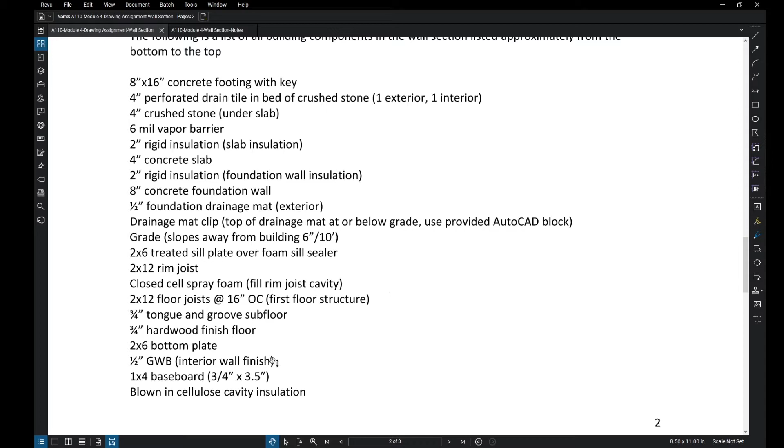I suggest you read through the list of building components in the instructions as you examine the wall section drawing that includes the notes. And that's what I have open here. So here are my instructions, and these show in the details a list of all the building components that will be in this wall section. They are listed approximately from the bottom to the top. So we start at the foundation with the footing and work our way all the way to the top of the wall section. So if you're trying to figure out where these are, that will help you understand in the wall where they're located, top to bottom.

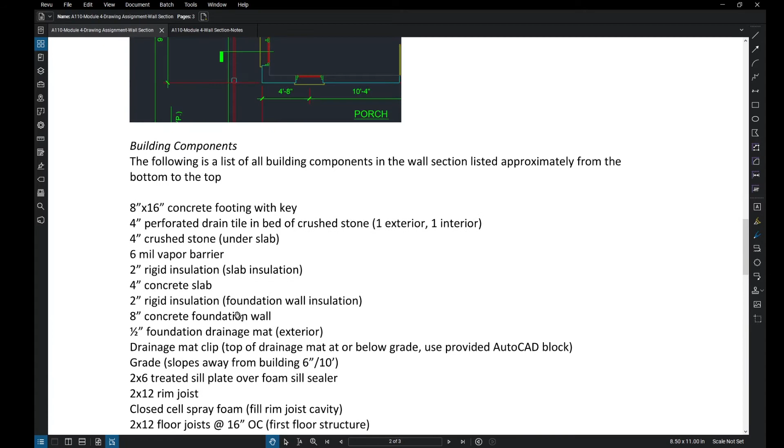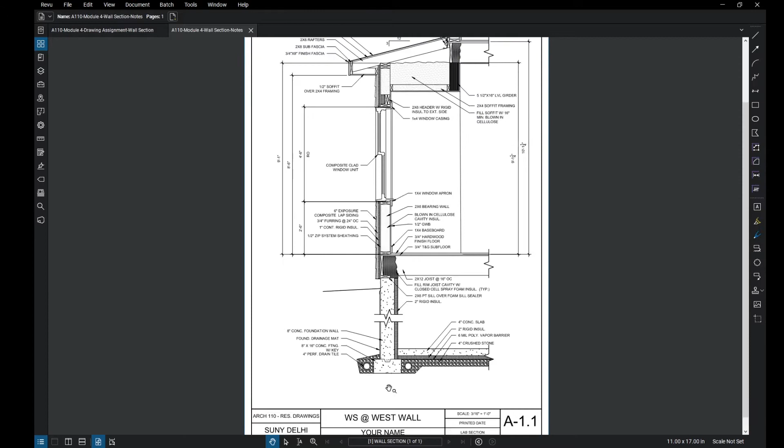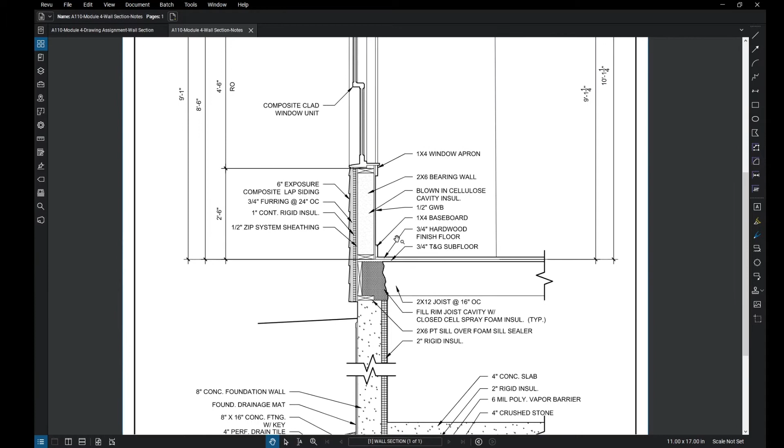And I suggest reading through this list as you look at this, which is the wall section. This is essentially the same as your final deliverable, only that you don't need to place notes or dimensions on your drawing. So read through those notes as you look at this drawing. And this drawing includes some notes as well. So it points to some of those things in the instruction notes. The instruction notes are a little bit more comprehensive. It lists everything that might not exactly be listed here. A lot of times I won't have something noted here because it would be redundant, whereas in the notes and the instructions I do have them listed.

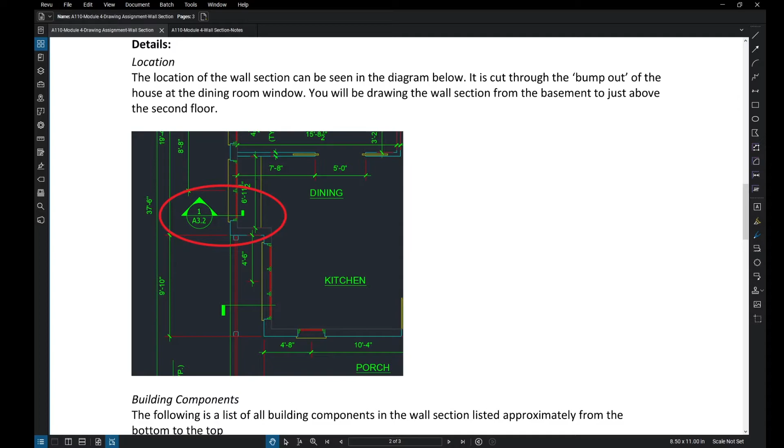Before we get started, it's important to understand exactly where this section is being cut. In your instructions, it has this location. So we're in the dining room in our double mull window unit, and we're cutting through the wall here. And we're looking north. So the exterior is going to be on the left hand side of our drawing, and the interior is going to be on the right hand side of our drawing. I'm going to jump to CAD now, to AutoCAD.

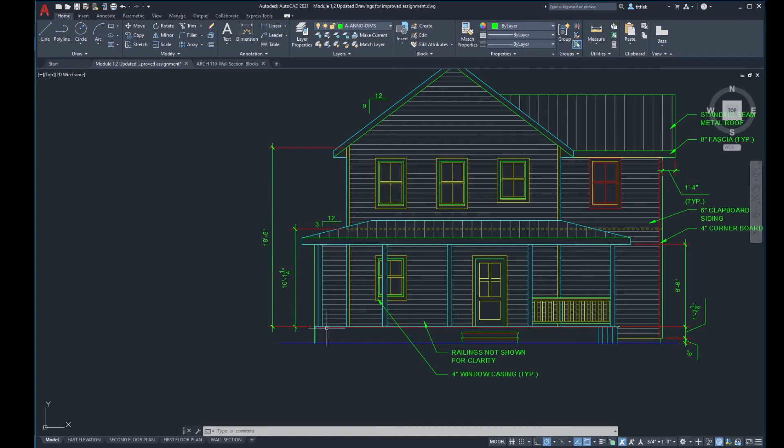So again, this is exactly where we're going to be cutting this drawing. So we're cutting it through what I've been calling the bump out, this portion of the building. We're going all the way down into the basement and up to the roof structure of the bump out itself. So if you look here in our elevation, we're going to end the section somewhere on the second floor, right above the second floor around here. We're going to be cutting through this roof structure, down through the interior of the building, and then into the basement. So that's the first thing you want to do, is familiarize yourself with where this is going to be cut. And we're cutting through a window, so we're going to see what this looks like in section.

I'm going to start my drawing with this building section. Much like many of our other drawings, I always try to start by using a drawing that already exists, that has some information that I already need in my new drawing. Now we're looking in the wrong direction for my wall section. My wall section looks opposite this building section.

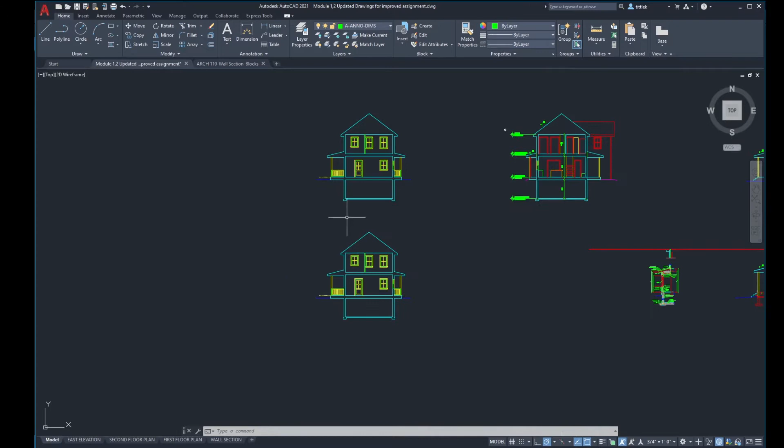So what I want to do first is copy this. I'm just going to copy it downwards. Again, a comfortable distance. You can see how many different drawings I have in my own file here. I have them spaced a comfortable distance so that when I place them inside a viewport on my layout tabs in my paper space, I have enough room so that I don't include anything else. Now that I've copied it down, as I mentioned, this is looking in the opposite direction.

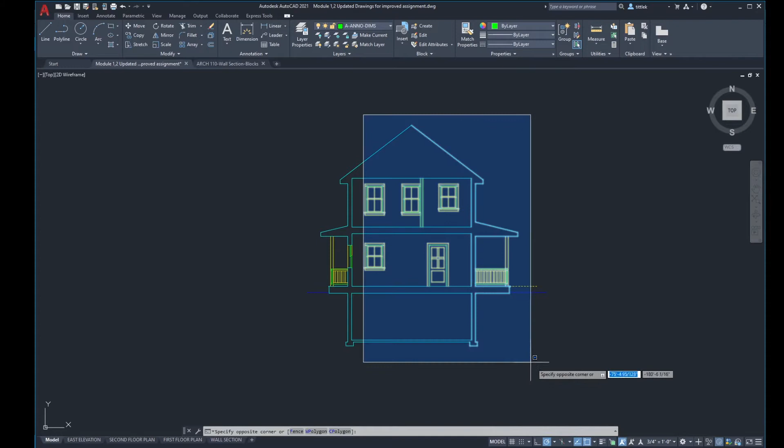So the first thing I'm going to do is flip this around using the mirror command. So MI, enter. I'm going to select this entire thing, and I'm just going to use my ridge as my point, drag a vertical line, and when it asks me to erase the source objects, I'm going to say yes, because that'll just flip this entire section. And I'm going to erase pretty much everything from these windows to the right side of my drawing. I'm just going to hit delete.

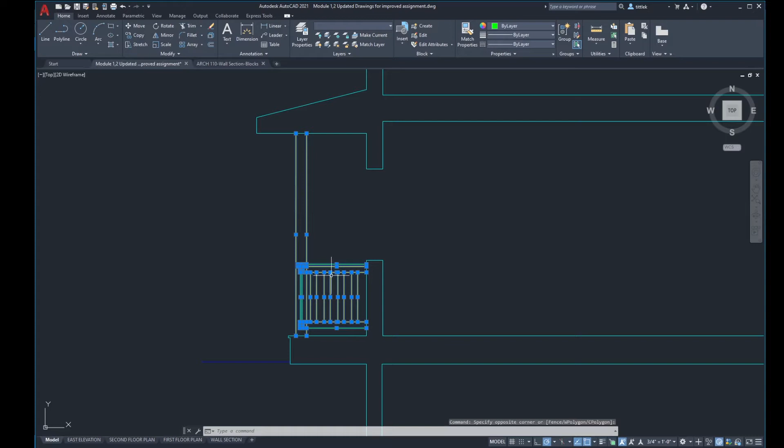I'm also going to delete this window because this building section was cut through the kitchen, and now I'm cutting through the dining room, so that window is going to look different, especially because we're adding a lot more detail. Going to also delete all of this porch railing and post. And now I have a good start for my wall section.

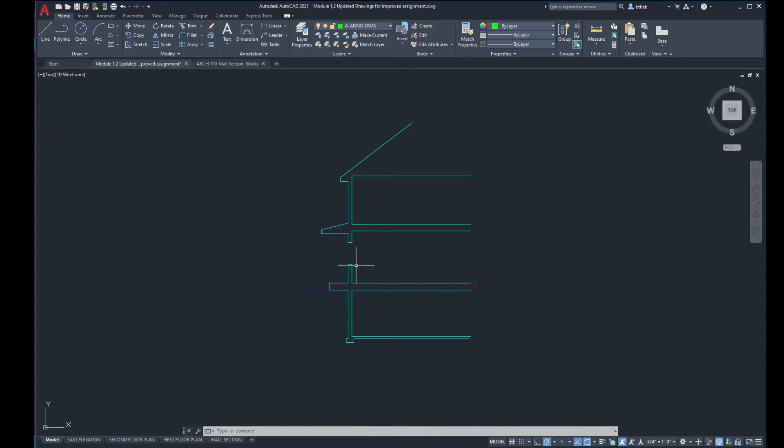I should also note that with the amount of detail that we put in our building section, some of these lines may not exactly be in the right place, but this at least gives us a good start. The way that I like to draw my wall sections is I like to start just like you would build the house. Start at the foundation and work your way up. So that's exactly what I'm going to do here.

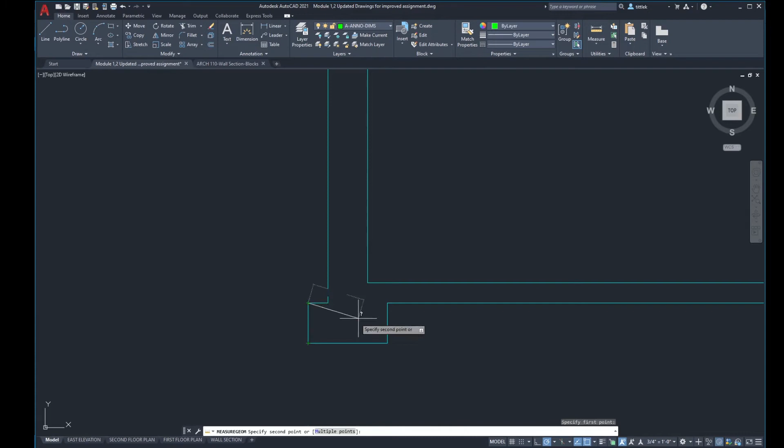So I'm going to double check how I drew my footing in the building section, and it is in fact 8 by 16. My wall, my foundation wall, is 8 inches as well. So all of these lines can remain. I'm going to draw the key. Keys are typically 2x4s that are set into the formwork, but they're shown at an angle because you want to give it what we call draft angle so that that can be pulled out of the cured concrete.

For now, I'm going to draw most of my lines on the color 004 layer. I will work on getting my line weights correct as I go through this, but I'm going to get some stuff drawn first. So I'm going to start by drawing a line across the bottom of my foundation. I'm going to draw kind of in space a 2x4. So a 2x4 is 1.5 inches by 3.5 inches.

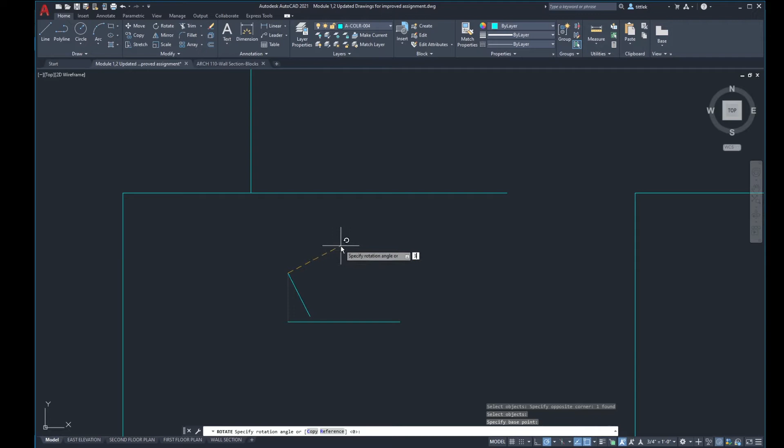What I'm going to do right now is I'm going to rotate this line, let's say 30 degrees. That looks pretty good. So I rotated that line around this base point and I got 30 degrees. And now I'm going to extend that line. Now, oops, that is what I'm calling my draft angle. Now I can mirror that line using the midpoint of my 2x4.

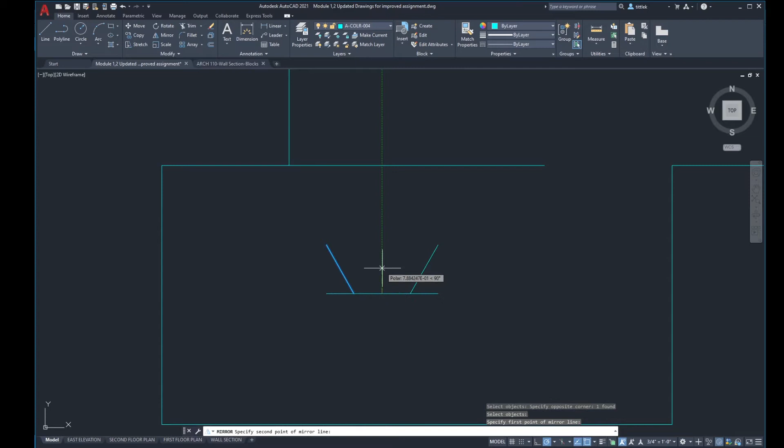I can trim those lines, and now I can move this, and I'm going to use my shift right click mid between 2 points, this point and this point, and I'm going to place that at the center line of this line, which is the 8-inch of my foundation thickness.

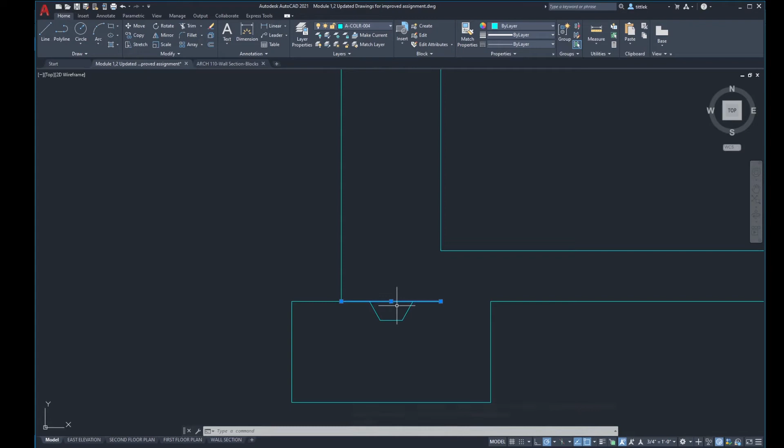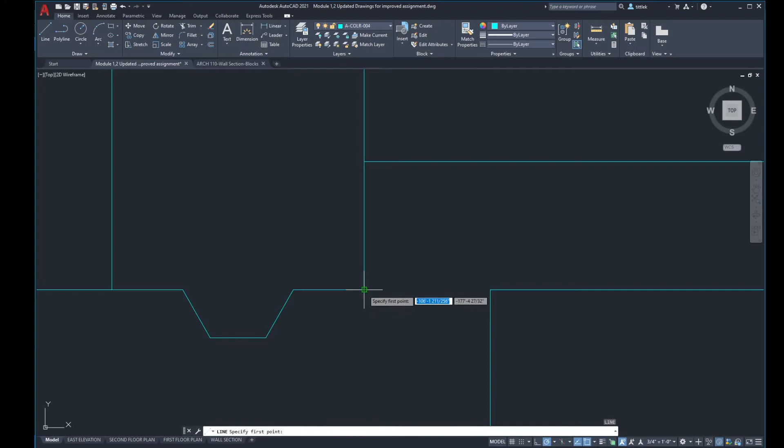Now I can trim to those lines, and I can draw a new line up to here. So there's my key. Every now and then I double check a few dimensions if I drew something and it doesn't quite look right. Now my footing continues to this side. Now the way we drew this in building section was as if this was only a 4-inch slab.

Whoops, went to the wrong drawing there. So I can get rid of this line, and that 2 inches of rigid insulation, the bottom of that, aligns with the top of my footing. So I can offset 2 inches upwards. And actually, before I even do that, I'm going to maintain that 2-inch offset because we have 2 inches of insulation along our basement wall. Now I can repeat offset 4 inches is what I'm going to set it to for my slab.

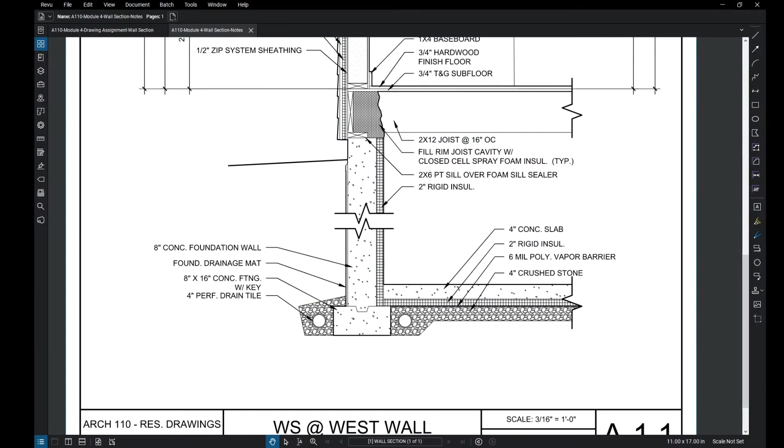I also have 4 inches of stone below my insulation, so I'm going to repeat offset with the 4-inch and drop that down here. Now I can start cleaning some of this up. We know that it doesn't really matter where our insulation goes here. If you think about how this might be placed, this vertical insulation, the way that I have it drawn now, goes in first and then this does. So there is a line there.

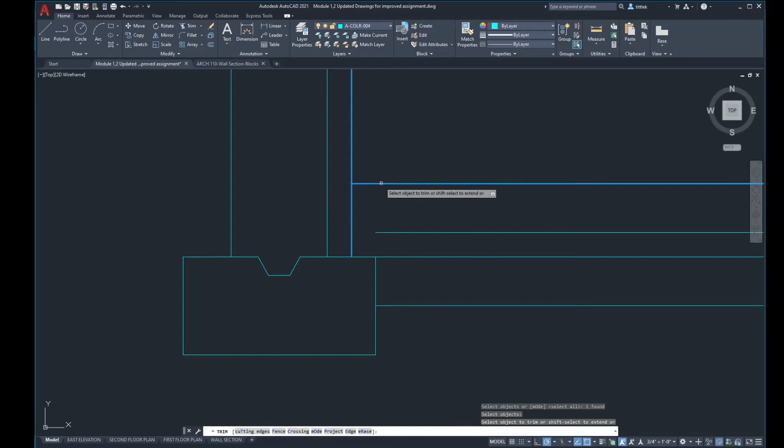Keep going to the wrong drawing there. So we are going to extend that line down to there, extend these lines over to here. And you know, I'm showing more of the building than I would in my wall section, but I can worry about that later.

So I've got all my lines in here. Now I need a 4-inch drain tile. So looking here, this is about 8 inches deep this way, and this is a 4-inch drain tile. So I am going to draw a line showing this bed of crushed stone, which in our drawing we can see goes down to the foundation, down to the bottom of the footing.

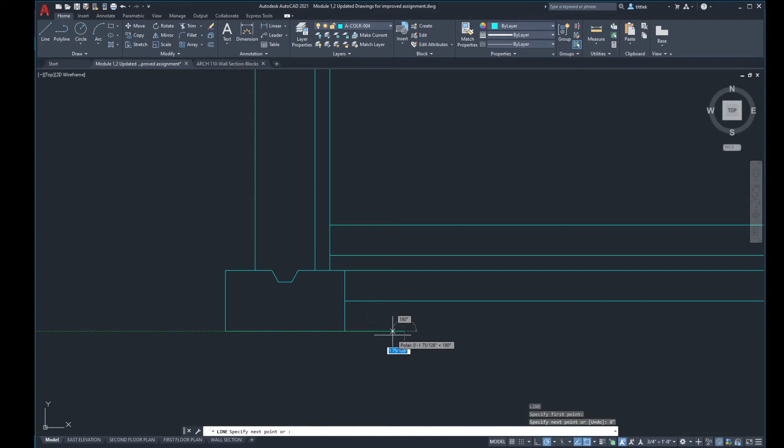And I'm going to go over 8 inches, and then I'm going to simply go up on a 45-degree angle. So this crushed stone base, this 4 inches of crushed stone below the slab and the insulation, needs to get a little deeper right here at our footing so that we can put in a drain.

Now you'll almost always see an external drain. We always need a drain on the outside. A drain on the inside is a good idea in wet areas. It's also just a better practice. So we're going to throw in a 4-inch circle.

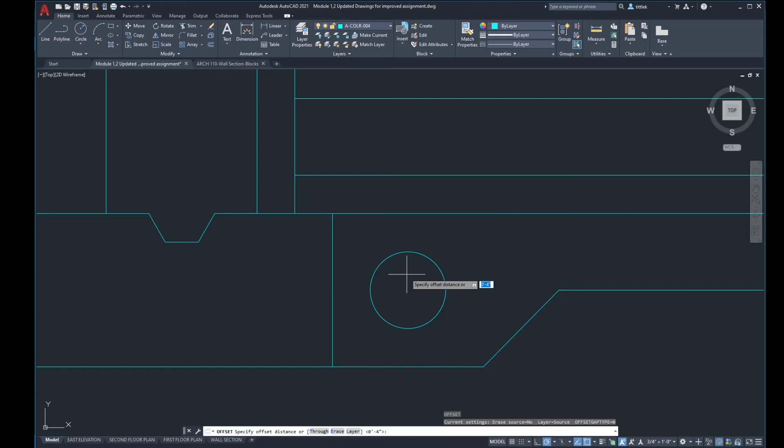And I'm going to move that. I just drew that sort of randomly, and then I'm going to use the center point. And again, my shift right click mid between 2 points. I'm going to click the midpoints of that box, if you consider this an 8-inch by 8-inch box with a 4-inch circle in it. I'm going to offset. I don't really know the thickness exactly of that pipe, but a 1/4 inch is about the most I'll ever see in a 3/4 inch scale drawing, which this is.

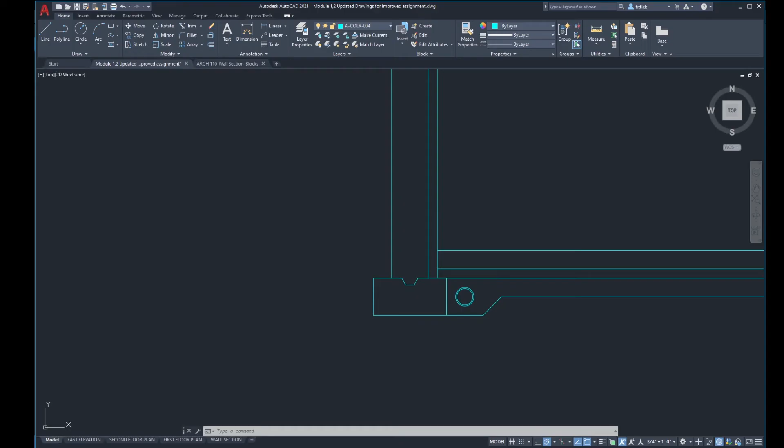Now, I could do my exterior drain, and most people know me that I don't like to draw things twice, so I'm going to simply mirror this. And I'm going to use the midpoint of my footing and mirror that over there. I do not want to erase the source objects. And you can see that this kind of comes out.

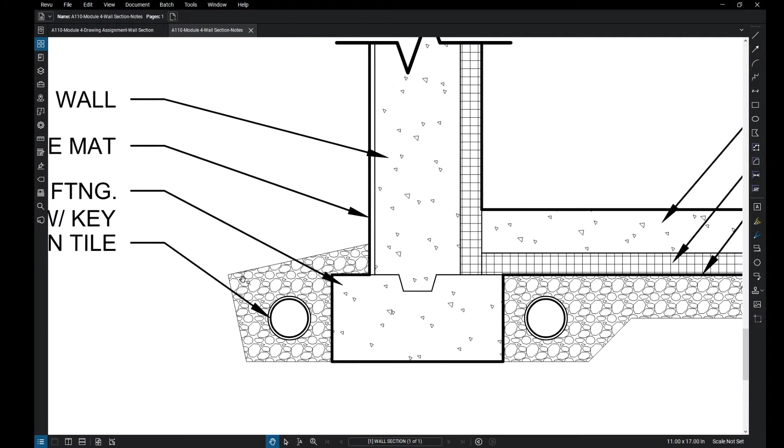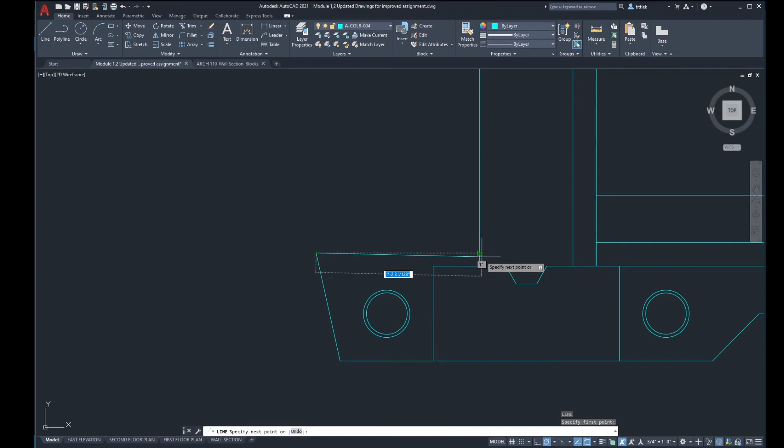Generally what you want to show in your drawings is your exterior drain is going to be encapsulated with this crushed stone, and it tends to be in an area that goes a little bit above the footing, and this entire thing will be wrapped in geotextile fabric to prevent dirt from getting into our crushed stone. So I'm just going to grab this line, looks good, and then I'm going to bring that up on some angle. It doesn't have to be exact, so I'm going to grab that and bring that up to there.

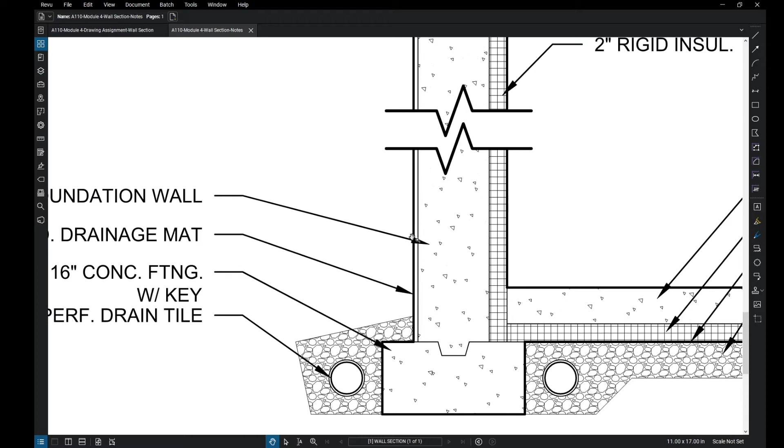Now the other thing that I have on this wall is a drainage mat. What that allows to happen is any water that does flow through the soil and meets this foundation wall will encounter this drainage mat, and all that water will fall down this drainage mat and drain into our stone bed here and into our drain tile and away from our building, because water is the enemy. So we're going to offset 1/2 inch to the outside face of our foundation. Now I have most of my line elements that I need.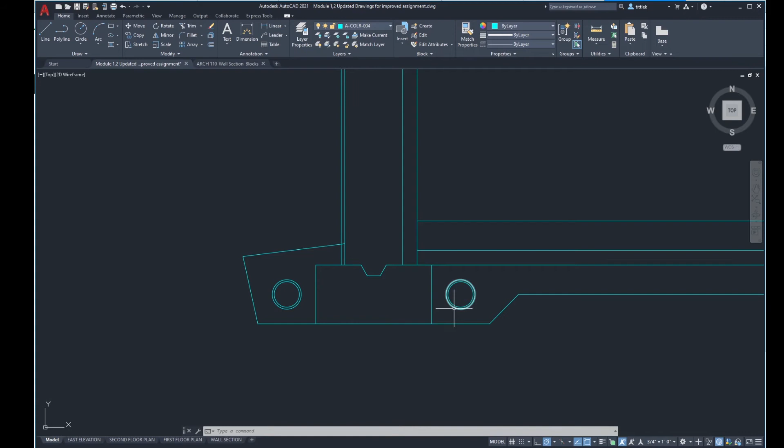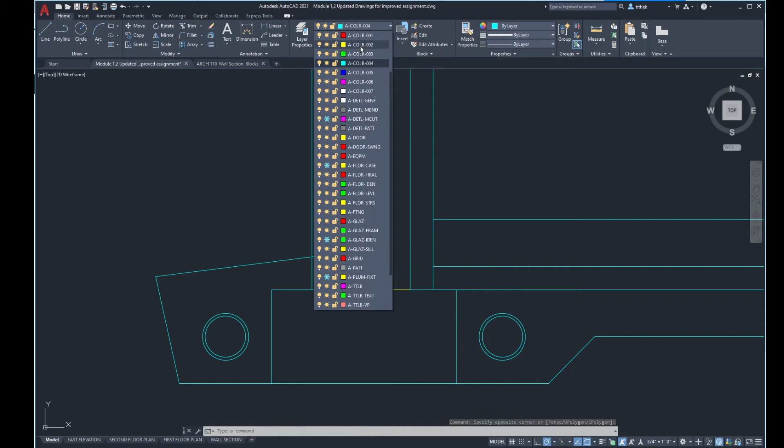Now let's start talking about line weight. So our cut line, the thing that we're actually cutting through, is going to be our heaviest line, and that is going to remain this color 004 or cyan color. Anything that is inside of the cut, for the most part, I will be drawing with a yellow layer. So let's start to change the line weight of these lines to match that standard. So this here is going to become yellow. The joint, and anywhere where one material butts up against another material within the cut, I'm going to make yellow.

And now that I have some yellow here, I can use my match properties button, and I'm going to paint that color in other places. Now this is two lines. I can delete that line, and I can extend that line down to here, because again, we never want to use two lines when we can use one. And if I think about what I'm cutting through, my footing, and I'm coming up to my insulation, and that's going to be cyan. So everything within that cut is going to be yellow. So I'm going to again grab this and paint this line.

Now I need a yellow line from this point here down, because my cut runs down the face of this insulation and over my slab. So I'm going to trim that back to there, add in a new line, and then paint that line with the yellow color.

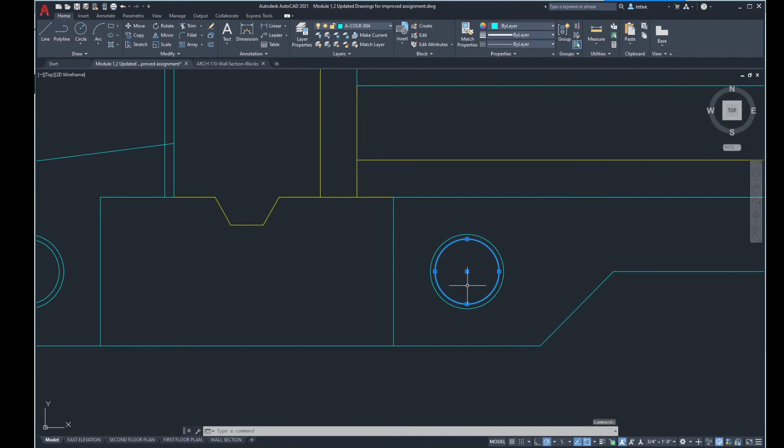For my drain tiles, I'm cutting through the outside edge, but there is a void here inside. So generally, anywhere where I'm next to a void within a cut, I tend to make green. These lines here represent the edges of a fill. I don't really consider that part of the cut. And let me trim this one back.

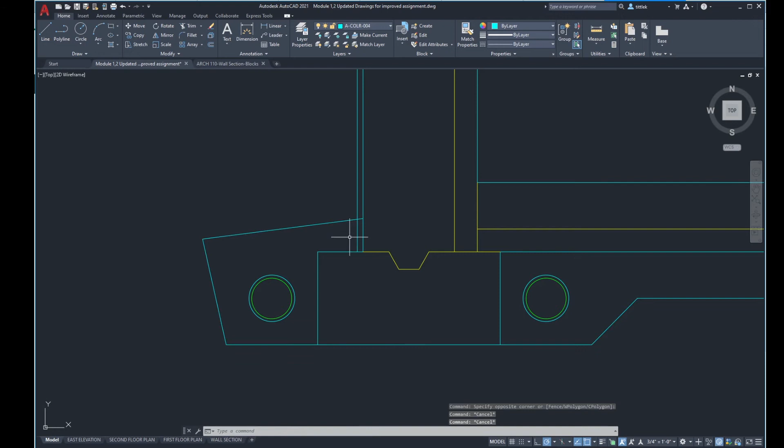But because they're containing a fill, I generally put them on the pattern layer or the hatch layer, whatever you want to call it. This line here is also yellow. And now I'm pretty much done this area, my footing area. Don't forget to hit save.

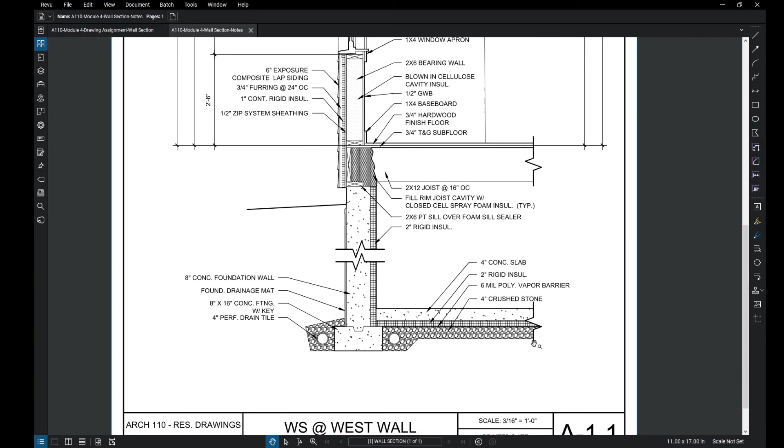So the next thing I'm going to do is start adding a few break lines in, because as you can see in our final deliverable, we break the floor, the basement floor, the first floor, and the second floor using break lines, because we don't need to show any more of the drawing. It wouldn't fit on the page, so we break it using a break line. The other thing that we do is, to get this thing to fit vertically on this piece of paper, we break our foundation wall, our basement wall, with two break lines, and we remove some height.

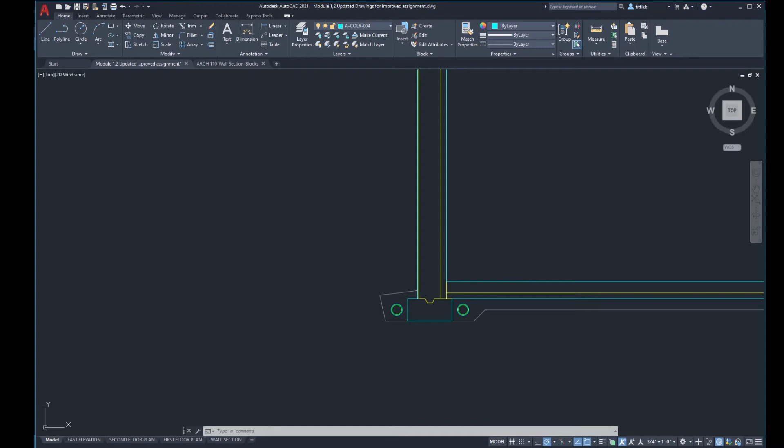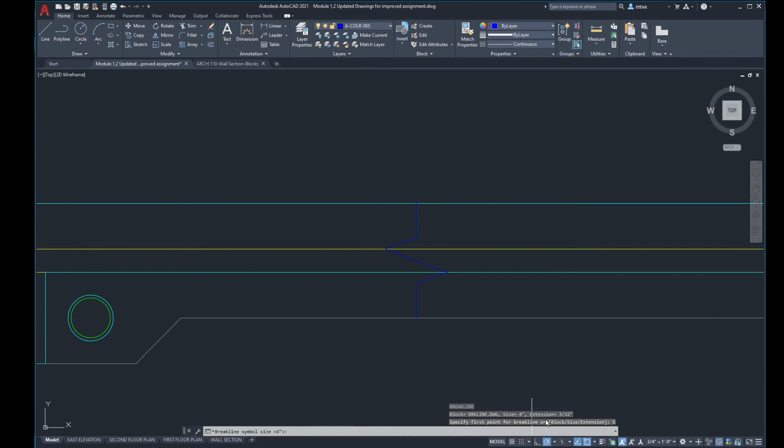So I'm going to do that now. I generally put my break lines on a fairly heavy line weight, so I'm going to use color 005 or blue. I'm going to use the break line command, and I'm going to use that bottom line to the top line and then use my center point. Now let me see, break line size. Right now I have it set to 4 inches, and I found that to be pretty comfortable. So you may want to set your break line size to 4 inches.

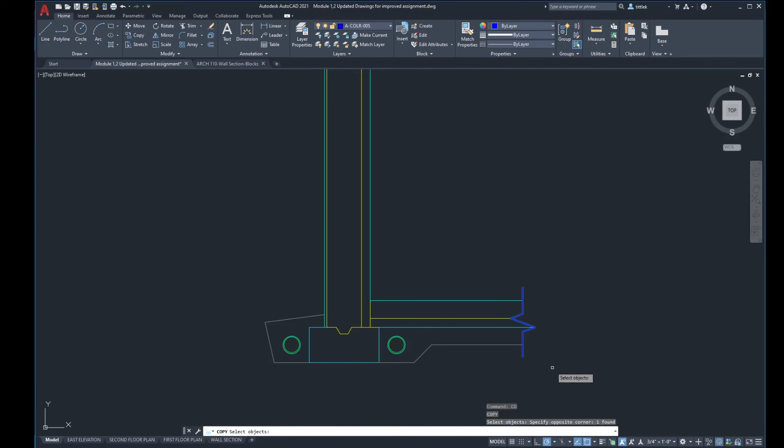I always extend these out a little bit. And now I can trim to that break line all of these lines. I can copy this break line because I like the size of it. And I use a midpoint, because now I can come to my wall and use any 2 points on either side of my wall, and it'll place that break symbol right smack in the middle of this assembly. And now I can rotate it again about that same point, 90 degrees.

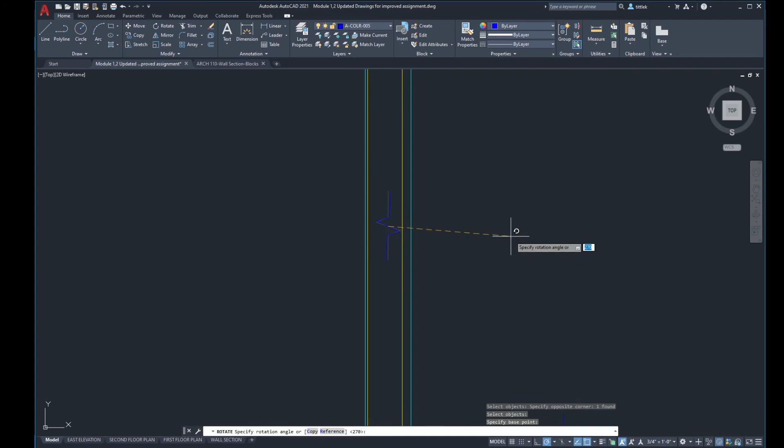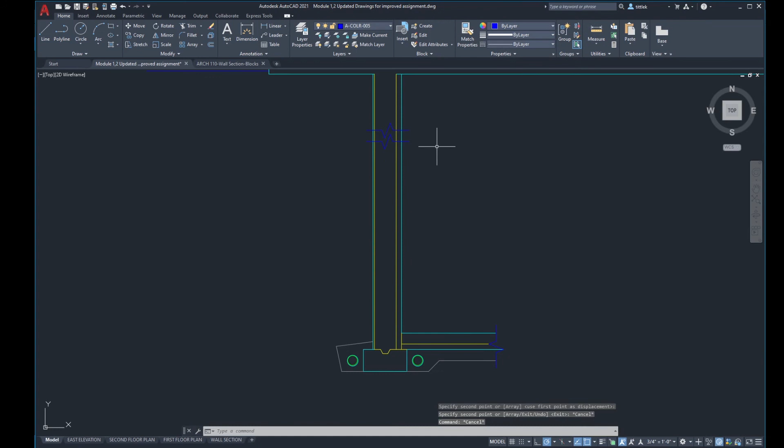I can move that down. Actually, I'm going to move it up. Let's look at how much space we have here. Let's call it 2'6", 3 feet. So I'm going to eyeball that here. I'm going to copy that. I'm going to trim all of those lines that pass through that break to show that it is being broken.

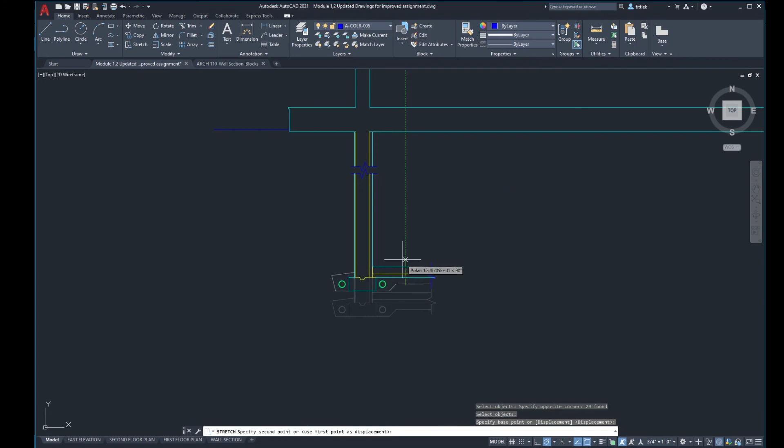And now I'm going to use my stretch command. So S, stretch, a right to left box around all the elements that I want to stretch. And then I'm just going to choose a spot out in space here and bring that up to about there. Now I want to make sure I have enough room to put my notes in, but then again, you guys aren't doing notes, so maybe you don't have to worry about that.

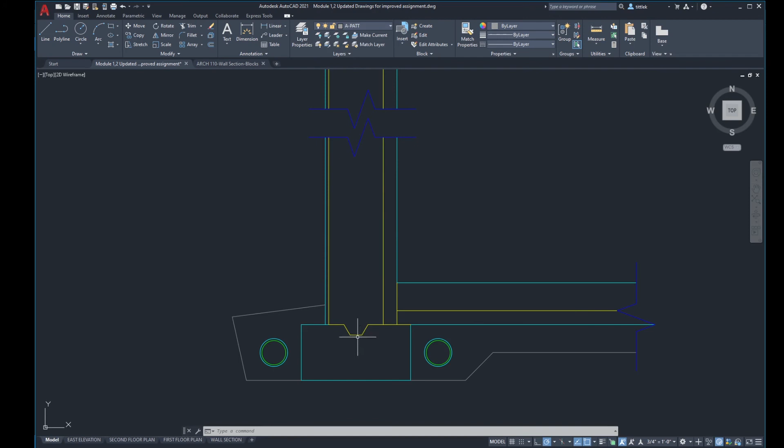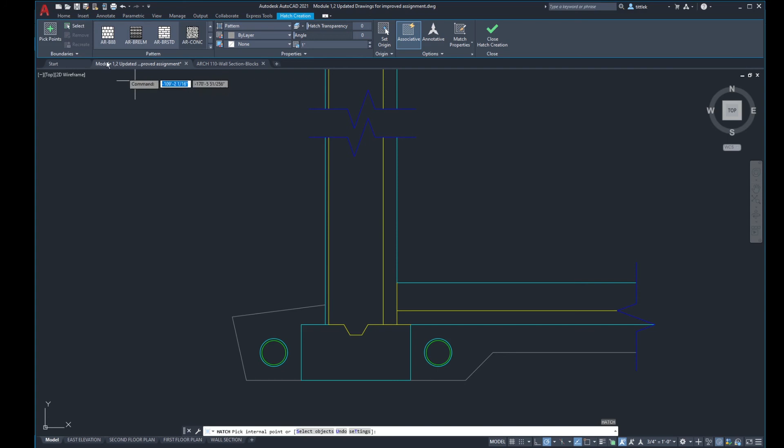Now that I have this line in, I have areas that I can hatch. So I'm going to move to my pattern layer again. I'm going to start with the concrete. So I'm going to type H, enter, to execute the hatch command. And in my hatch creation ribbon, I'm going to go to the pattern panel, click this button right here, and I can scroll up and down, but actually right at the top there's this AR-CONC, AR concrete. I'm going to use that, and I'm going to click pick points. I'm going to click in those places.

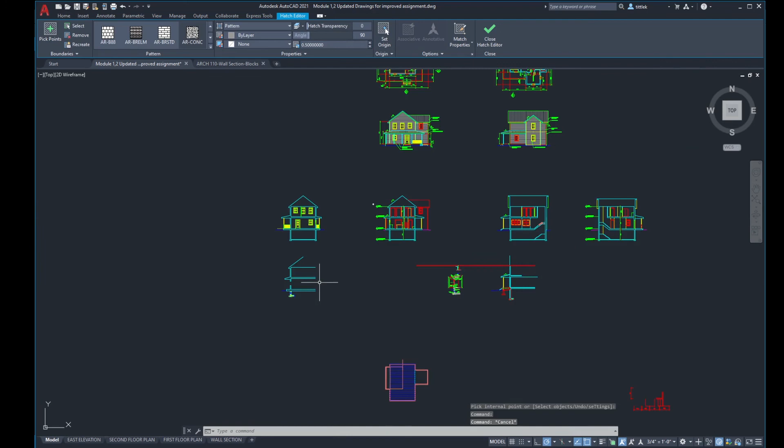Now my scale of that hatch is 1, and that doesn't look too bad. I'm actually going to jump over to my finished one and see what I did. I think I used 0.5 here. Let's go with 0.5. So I can select that hatch now and go back into the scale, type 0.5.

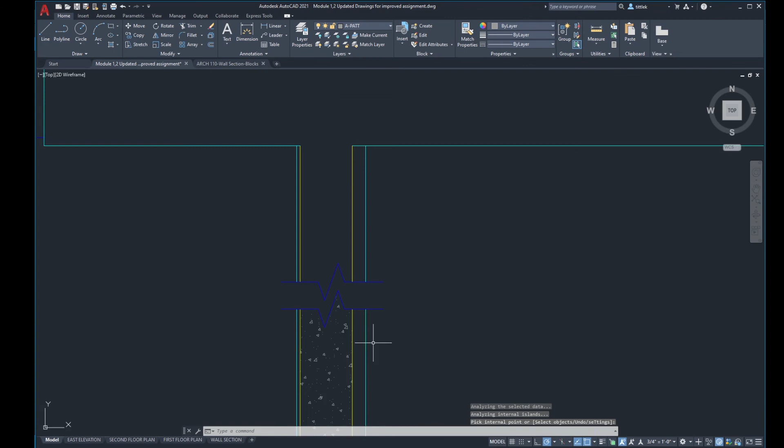Now I can hatch my slab. I like to have all these hatches as separate entities. And I'm not going to do the top of my wall yet because this is a big open space and it won't allow me to hatch that. And this is still the wrong scale over here, so simple enough, use my match properties and paint that to that hatch.

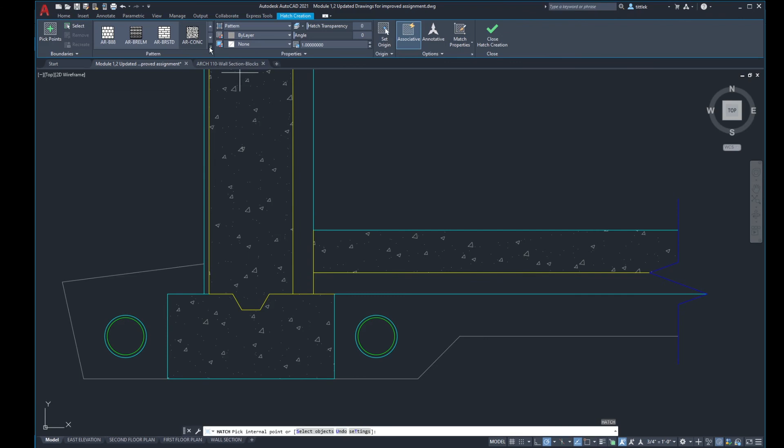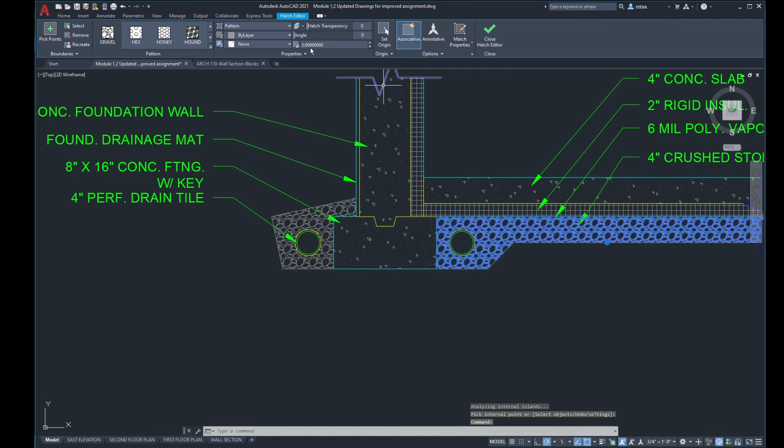I've got crushed stone in these areas, so I'm going to hatch that. H, enter. And for that, there's something called gravel. I like that hatch there. So I'm going to do one, and then I'm going to do another over here. Now that's pretty small. Again, I'm going to refer back to, no, I think that's about what I had there. A scale of 2 is what I did for my drawing. And right now it's set to 1, so let's set that to 2. That looks better.

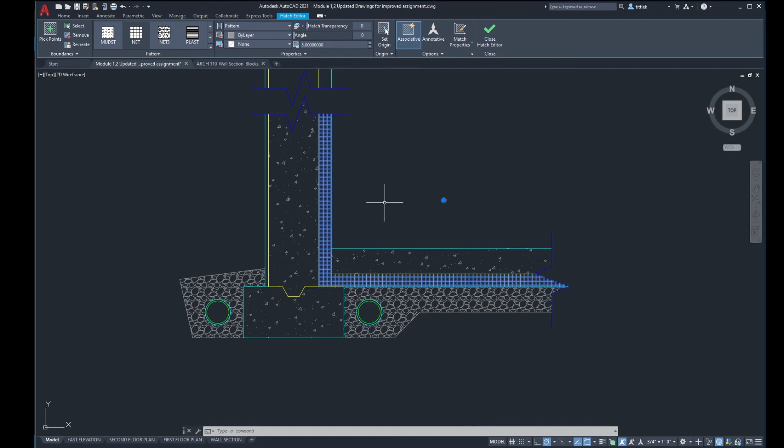Now we're going to do our rigid insulation. That hatch is something called net. It's just a crosshatch, a 90-degree crosshatch. Now obviously that is the wrong scale, but we're going to get that one in there, and let's try 2. Nope, that's still not. Let's try 5. 5 looks pretty good. Again, I'm going to refer back to my original because I don't honestly remember what I made it. 5. Okay. And see, I don't remember this stuff. You just have to kind of trial and error sometimes on the sizes of what looks appropriate for things like hatch. Now everything else has an actual dimension.

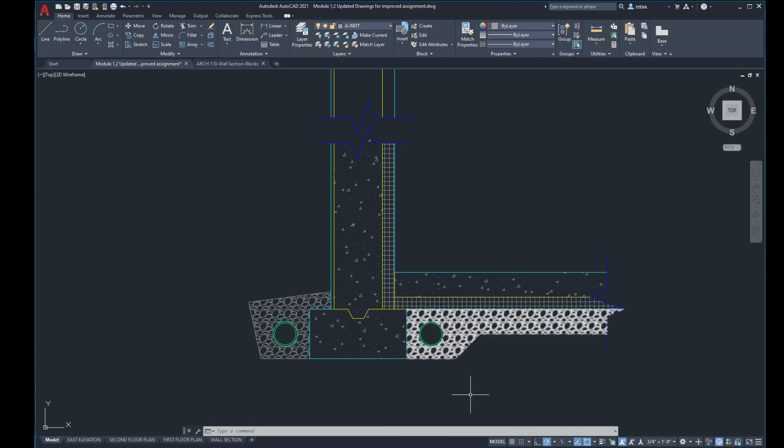So now we have our drawing finished up to the first break line with hatch, with the proper line weights, and all of the correct components. In the next tutorial, we'll move on from here.